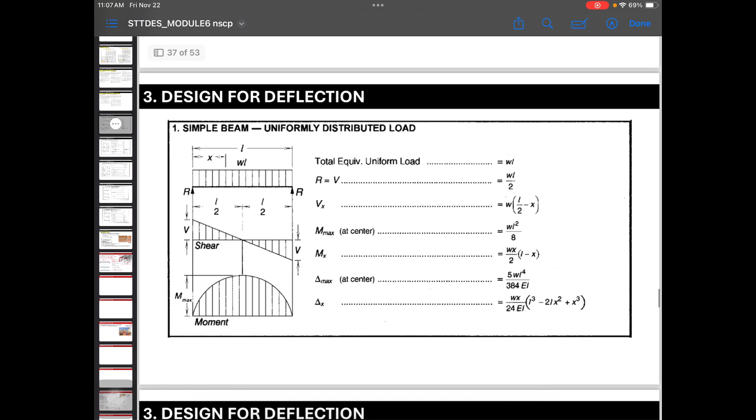Since I've given you a table of usual beam cases, you can refer to that. Search for whether this beam situation is there - a simply supported beam with uniform load. Actually it is there, number 1: a simple beam with uniform distributed load. If the load has a different shape, you can't use this anymore, but if it matches as is, you can use it.

So we need the maximum shear - that's what we design for. The maximum shear for a simply supported beam, as you can see, is located at the support points, at point A and B, which is the support reaction.

So the maximum shear equals the reaction. Since there are two supports and the load is distributed equally on the left and right side of the beam, the reaction at point A is the same as the reaction at point B. That's why R equals the shear, using the equation WL over 2.

So even without drawing the shear and moment diagram, you can use this equation readily. RVB equals RVA. To get the vertical reaction or the shear, substitute W, which is 1.348, and the length of 4 meters, then divide by 2. The answer is 2.696 Newton.

And since there's no horizontal load, the horizontal reactions at point A and B are both 0. So now we have the shear.

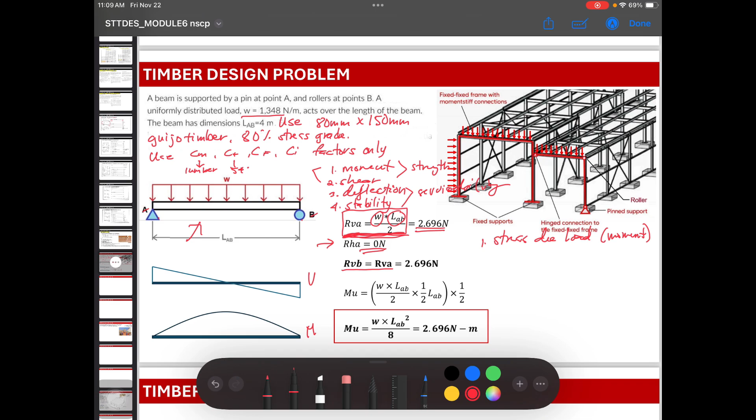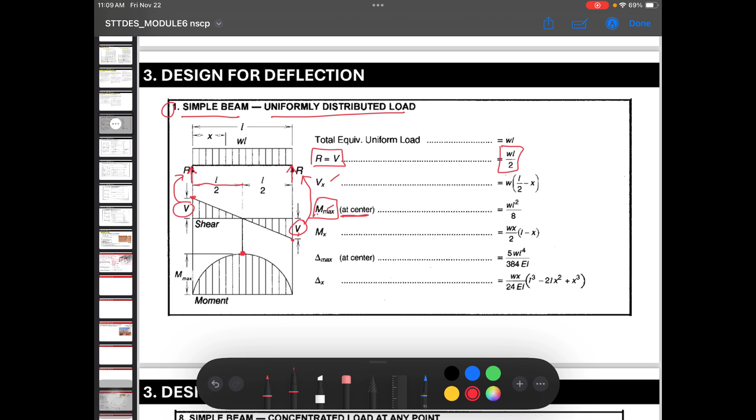So it says that occurs at the center. You can see here it's at the center, L over 2, L over 2, and the formula is WL squared over 8. That's the M max at the midpoint.

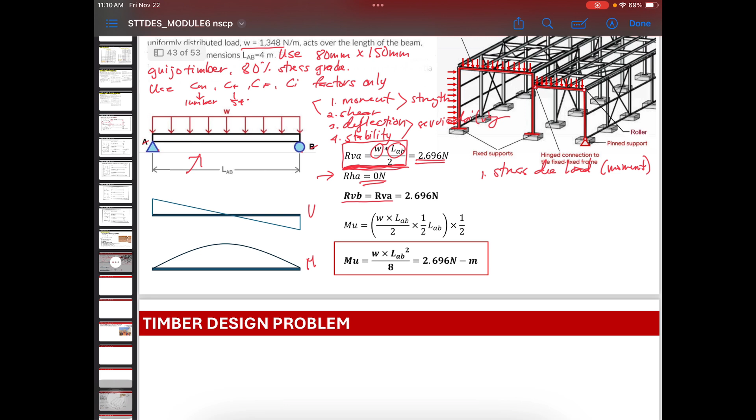That's why we have this formula, WL squared over 8, and when computed it equals 2.696 Newton-meter. When you substitute, W is 1.348, and the length is 4 meters - you square the length, then divide by 8. So that's our moment, and that's our shear.

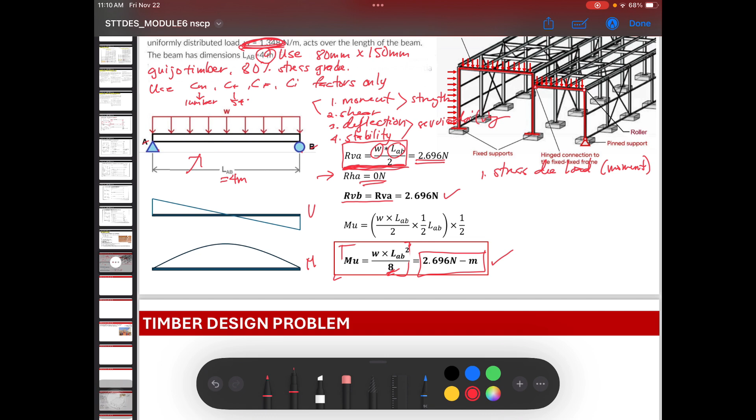Let's get the stress due to the moment. Let's take the moment first. Let's check the moment - let's design against the moment, which is equal to 2.696 Newton-meter.

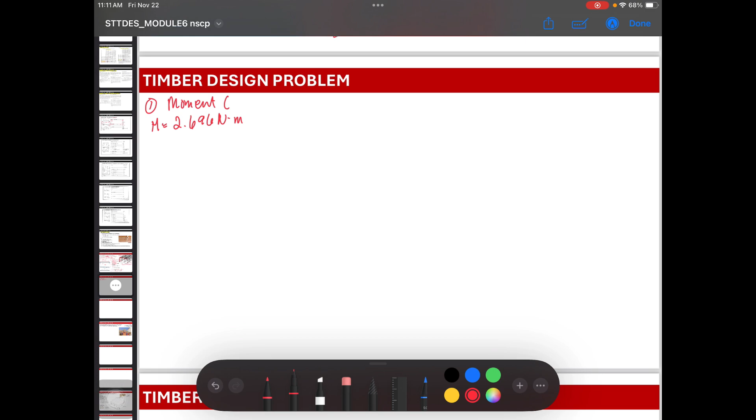What's our formula to get the stress due to loads? This is our moment load, so it's in our formula. This is the stress due to moment load.

FB is equal to M over S, where M is the moment load and S is the elastic section modulus, or it can be MC over I, where C is the distance of the farthest fiber of the section from its centroid, using this formula for a rectangular section. And I is the moment of inertia with this formula. So let's memorize D over 2, BD cubed over 12, and BD squared over 6 as the section modulus.

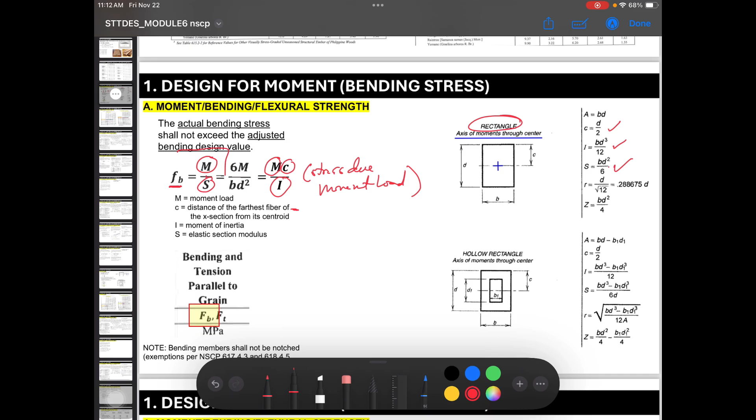So FB, the bending stress due to load, you can use this equation, M over S, or MC over I. Let's use MC over I first. So for the bending stress, denoted by small f subscript small b, MC over I. So we need C and I. Let's write the formula: C is D over 2, and I is BD cubed over 12.

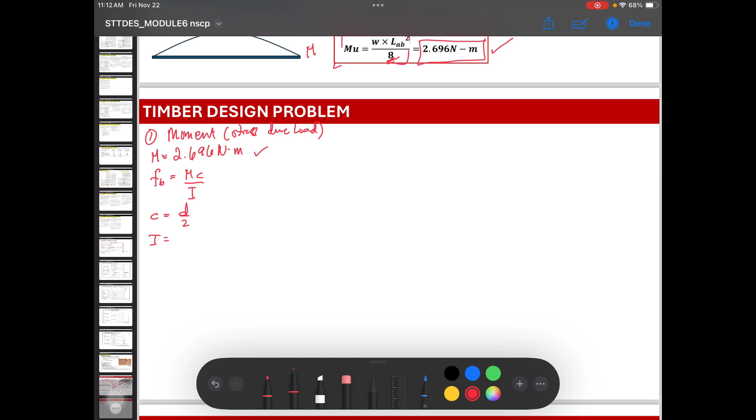What are our D and B? The section we're using is 80 mm by 150 mm. Let's draw our section: it is 80 mm, 80, and 150 mm. As we said earlier, these original dimensions are not what we use.

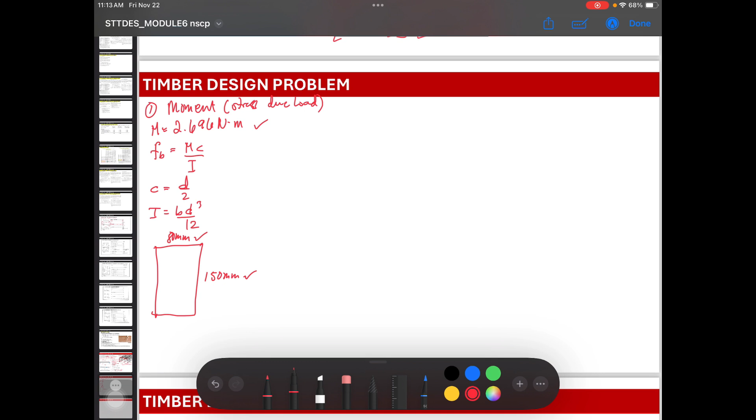Because we reduce these original, initial dimensions since we have an allowance for manufacturing or fabrication purposes. So we need to reduce them first. What is Rule A? If 4 inches and below, your reduction is 3/8 inch. If above 4 inches, your reduction is 1/2 inch.

So this is in inches, but we're using mm. Let's convert this into mm first. So 3/8 is equal to, converting 3/8, it is 9.5 mm. And then 1/2 is 12.7 mm. That's what we'll subtract.

So let's check our section. 80 mm, this is... let me erase. 80 mm, this is 3.15 inches. 150 is 5.9 inches. So this is less than 4, so our reduction is this 3/8.

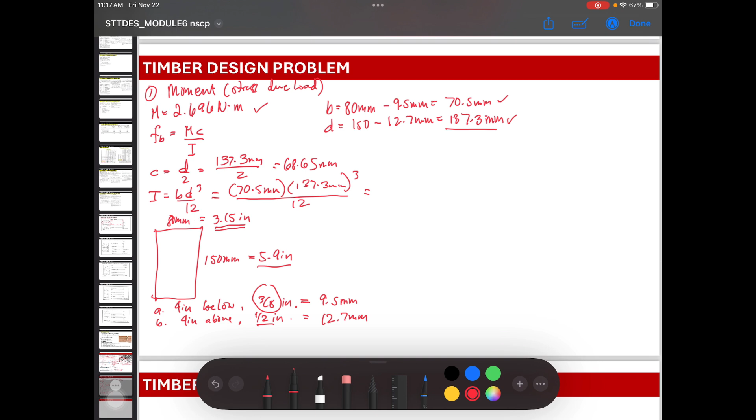It is 70.5 mm times D, which is 137.3 mm, cubed, all over 12. This is equal to, wait, 70.5 times 137.3 cubed all over 12. It's a long number: 15,206,157.44 mm raised to 4. For moment of inertia, the unit is raised to 4, right? The exponent. So now it's complete.

We can now complete this bending stress due to load equation. Let's put here MC over I. So our moment is equal to 2.696 Newton meter.

So it's in meters, but our C and moment of inertia are in terms of mm. So we need to convert this meter into mm. How is the conversion? 1 meter is equal to 1,000 mm. That's the conversion, so it cancels and mm remains. That's how we converted the moment.

Now for C, let's attach C to complete the equation. And then, all over moment of inertia, which is a long number, 15,206,157.44 mm raised to 4. So our answer will be 2.696 times 1,000 times 68.65 divided by 15,206,157.44. Our answer is 1217.

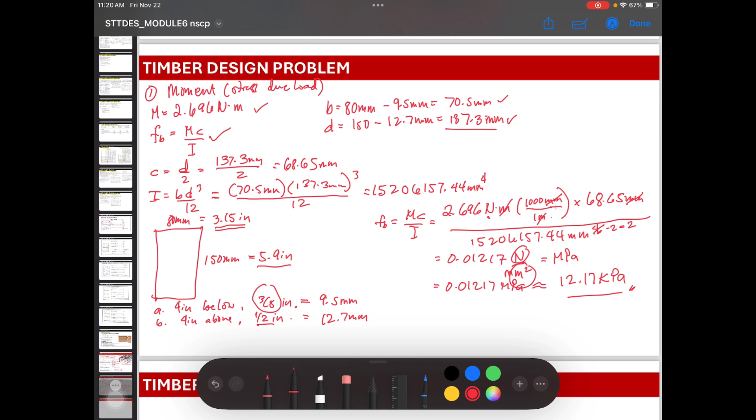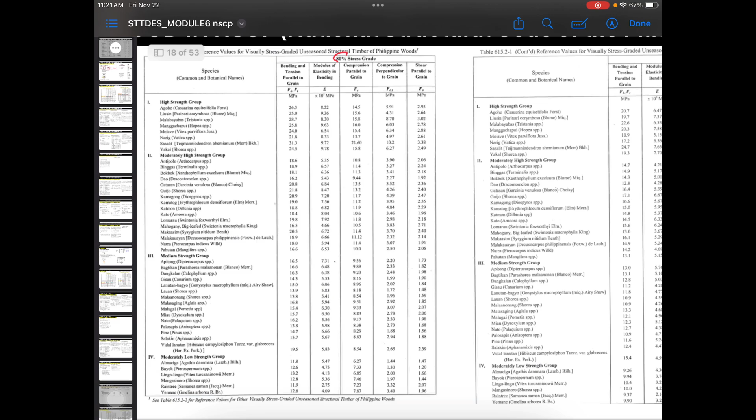Let's get the bending stress capacity of the beam, denoted by capital F, subscript capital B. So what did we say? The bending stress is already given in the NSCP table. So check what your material is. It is Guijo timber with 80% stress grade. And then we're designing for bending, so we go to the bending column. This is 80%, because the other one is 65.

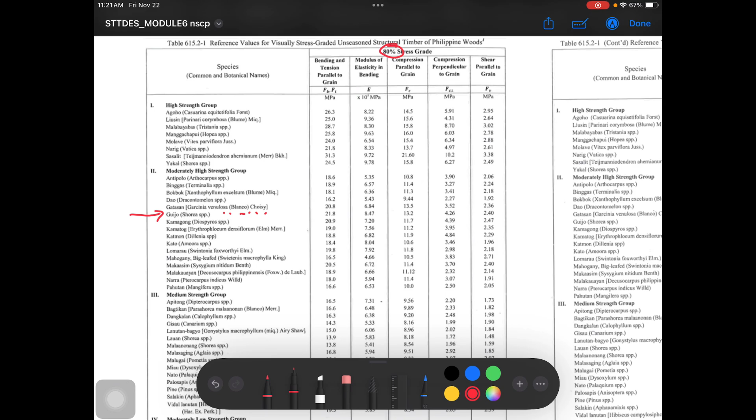Sorry, 63 is the other one. So we go to the 80% stress grade. And then we're designing for FB, so we go to the FB column. And take note of the unit, it's MPa. I wish we hadn't converted to kilopascal. Anyway, if you look, here is Guijo, and its bending stress capacity is 21.8 megapascal.

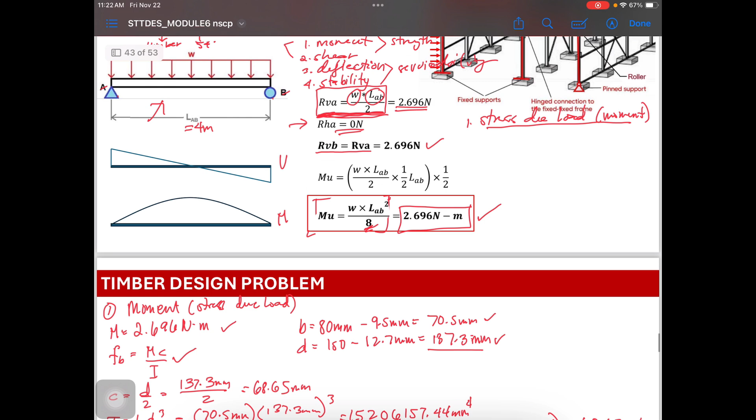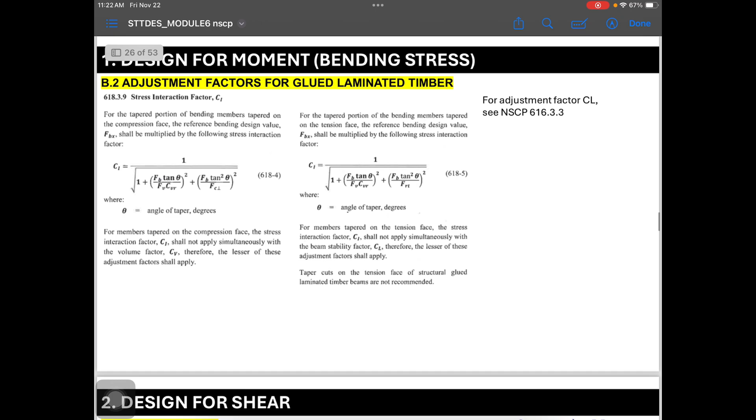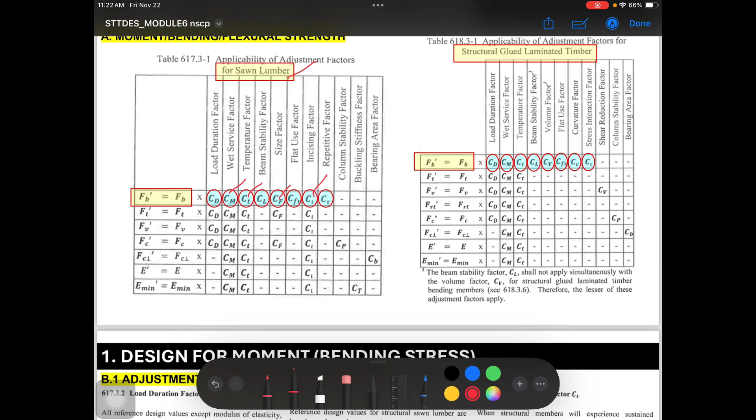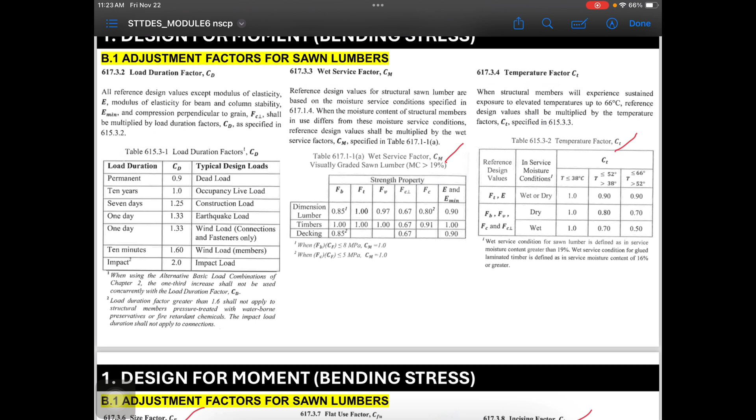So we have CM, CT, and the others are CF and CI. Let's get the factors we'll use. For CM, it's lumber based, right? And for FB, it's 0.85. There's a superscript, we need to check this one. FB and CF - let's get CF next.

Let's check this later. So 0.85 for CM, for CT it's for 54 degrees. And then for bending, we go with wet condition since we have a wet service, which is more conservative compared to 0.7. So it's 0.5.

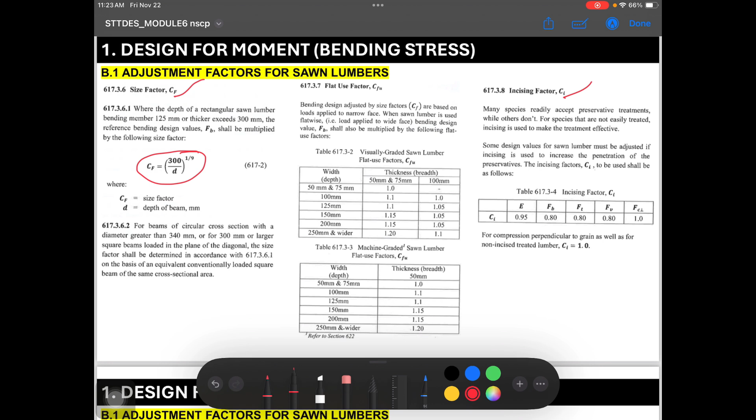And then we have a formula for CF. Let's take note: 300 over D, to the power of 1 over 9. And for CI, since we're designing for FB, it's 0.8. So we have 0.85, 0.5, 0.8, and this 300 over D to the 1 over 9.

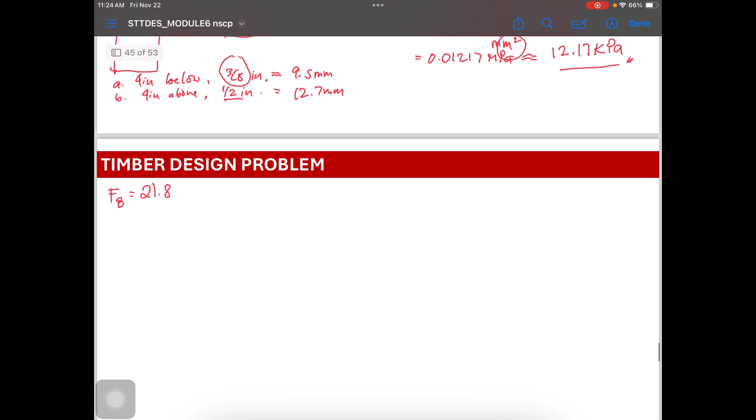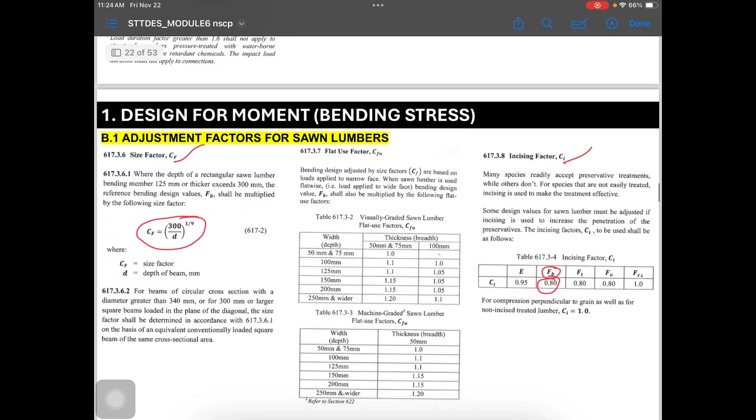So let's take note, CM is 0.85, CT is 0.5, and CI is 0.8. CF, oh my gosh, I can't remember. What's the formula for CF again? 300 over D to the 1 over 9, as you said.

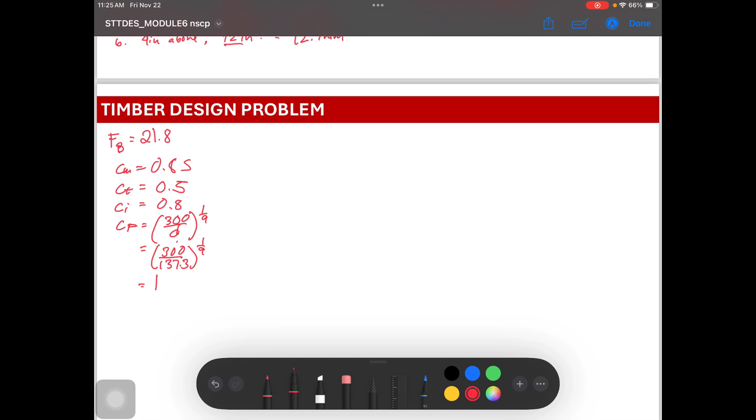300 over D to the 1 over 9, okay? So we need D. What is our D? 137.3, right? So let's substitute: 300, 137.3, to the 1 over 9. And this equals... let's compute it below. 300, 137.3, raised to 1 over 9. That gives 1.09 - that's our CF.

And then we need to read the footnote. CF is 1.09, let's read the footnote. Where are we - shear 2, no, let's go to moment for sawn lumber. Moment, sawn lumber, CF... no, the footnote is for CM: when FB times CF is less than...

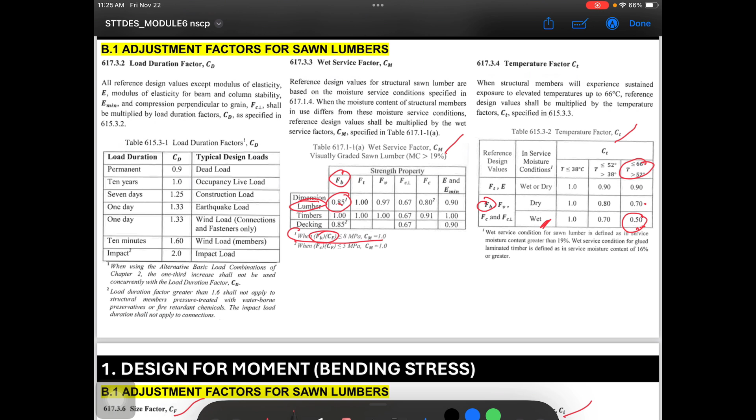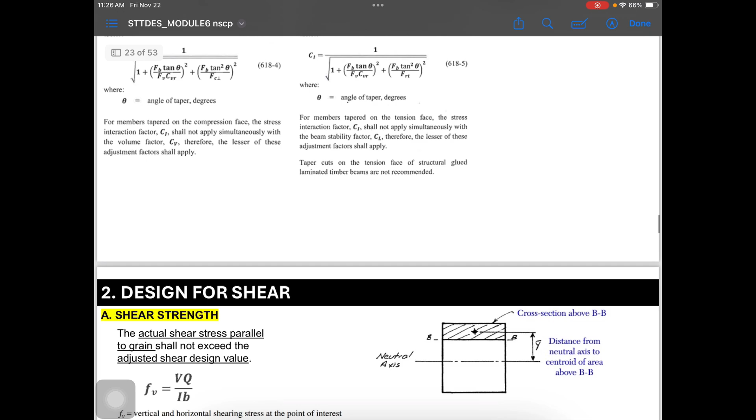Let's follow this. What's our FB? 21.8, times CF. What's our CF? Anyway, if it's less than or equal to 8, it's just 1. FB times CF should be less than or equal to 8. What's our CF? 1.09.

Oh, it's 20 - greater than 8 MPa. We can use this one. We're greater, so if it's less than or equal to 8 MPa, our CM would be 1. So it's okay - actually it's more conservative if we use this one.

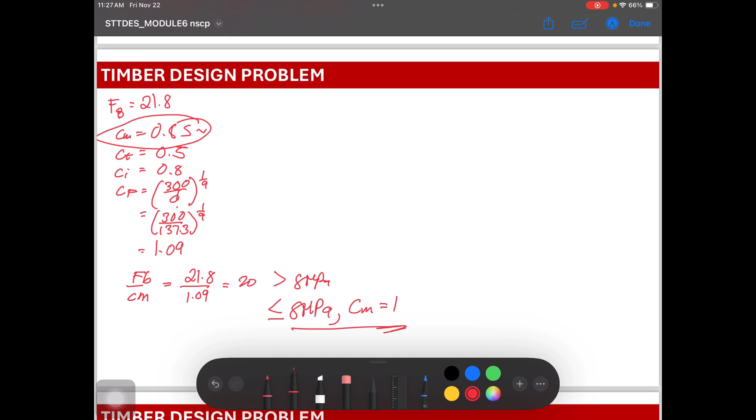Not 1. Okay, so next, let's apply these factors to FB which is 21.8. So our effective FB is equal to 21.8 times CM which is 0.85, times CT which is 0.5, times CI which is 0.8, and times CF which is 1.09. If you want to be conservative, you can just put 1, but earlier the conservative value for CM is 0.85 rather than 1. Let's compute 0.85 times 0.5 times 0.8 times 1.09.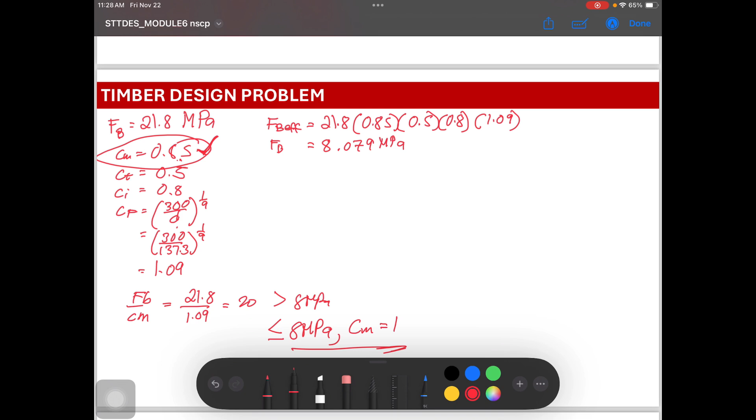Oh, it's getting late. We'll just use this in MPa. So this is our FB, the bending capacity of the beam. This is what we'll compare to small f-b. This is quite small, since it's in MPa - we compare using MPa, not kPa. So our bending stress is very small.

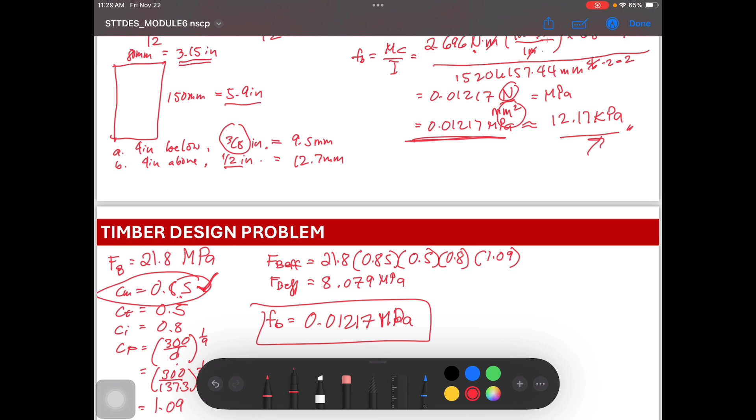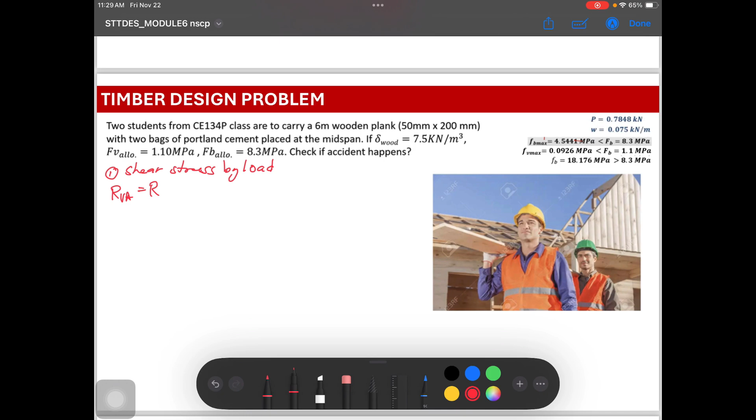So our timber's capacity passes - that's the conclusion. Okay, next, let's move to shear. What's our formula for shear? Step 1, you need to get the shear stress from the load. What's our load? It's R, or RVA, which is our RVB, and also our maximum shear.

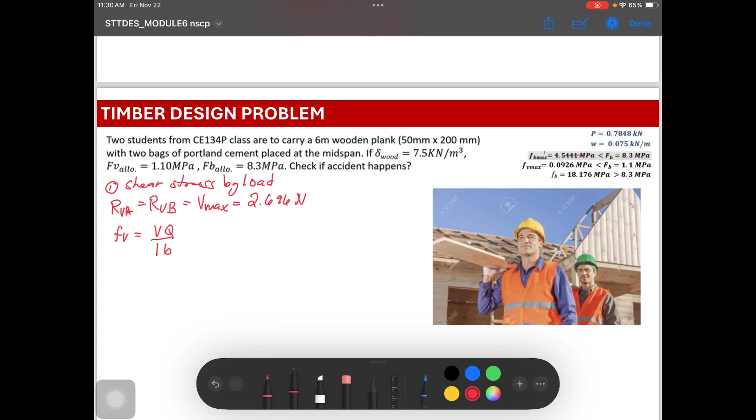And that equals 2.696 Newtons - that's our shear. So we need to get the shearing stress due to the load: VQ over IB. So what is Q, what is I, what is B? Let's go back to the lecture on shear.

Here, for shear, Q is equal to area times Y. So what are our A and Y? Our A is the area of the upper portion of the beam, and Y is the centroid of that upper area, its distance from the x-axis. So let's solve.

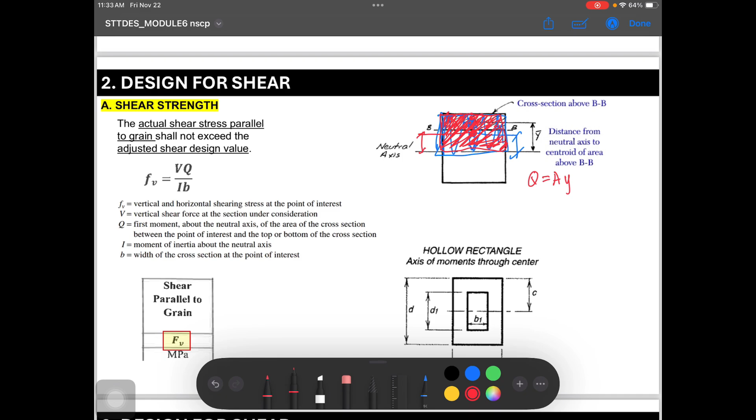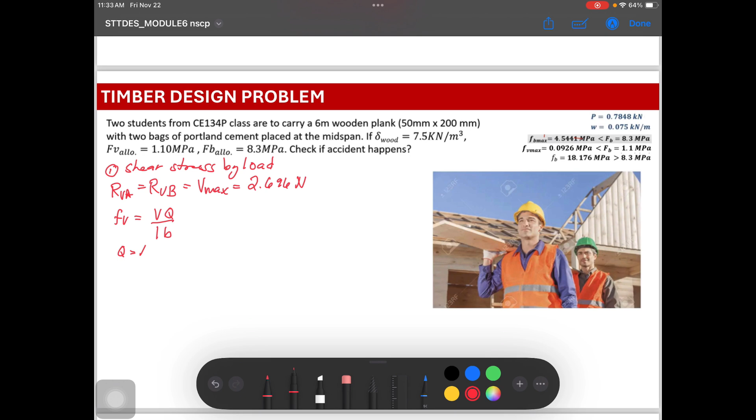So let's fill up. What is our Q? It's the area times Y. Let's draw our material, and since we're designing, we'll use the reduced dimension: 70.5 and 137.3 in mm.

So Q is equal to A times Y. Q is the area, the upper half only. So this one. That is 70.5 times 1/2 of 137.3. That is the area. And then, what is the distance Y?

That is the centroid of the upper area to the x-axis, which is 137.3 over 4. This is our Q, and it is equal to 70.5 times 0.5 of 137.3, times 0.25 of 137.3. It is 166,126.89.

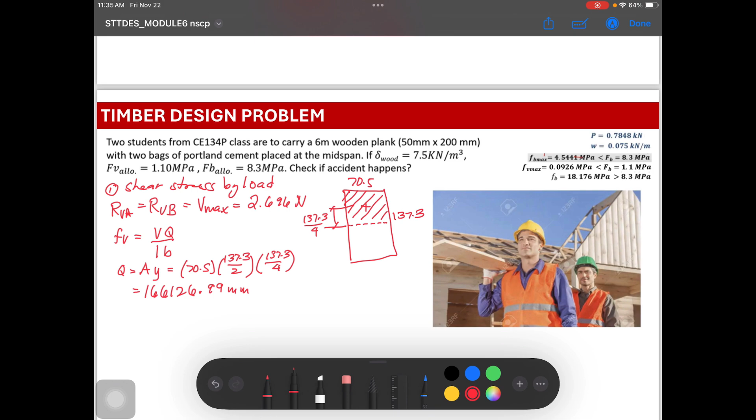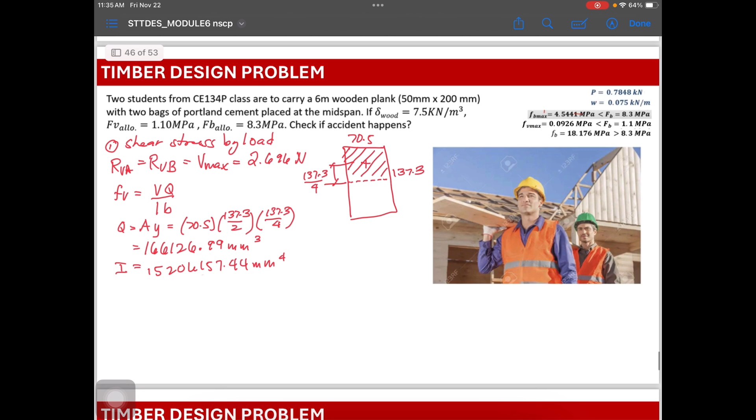And then what is our I? We already solved it earlier, so we can just copy it since we're talking about the same section. It's the same. That was included. Raised to 4, that's our I, we don't need to solve for it again. And then our B is the width of the section, which is 70.5 mm.

So let's substitute into our shearing stress due to load. What is our V? It's 2.696 Newton times our Q, which is 166,126.89 mm cubed, all over I, which is 15,204,157.44, and our B is 70.5 mm, this is mm raised to 4.

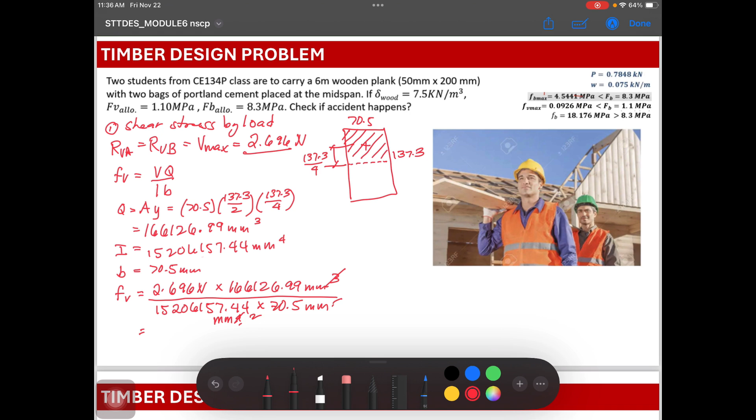So let's check the units. M raised to 3, then here 4 and then 1, so total exponent is 5. So it can cancel, leaving squared in the denominator. So that's correct, the remaining unit is a unit for stress, Newton per millimeter square.

So let's calculate: 2.696 times 166,126.99, denominator 15,206,157.44 times 70.5. Okay, so our shear stress due to the load is very small. It's only 4.177 raised to negative 4 megapascal.

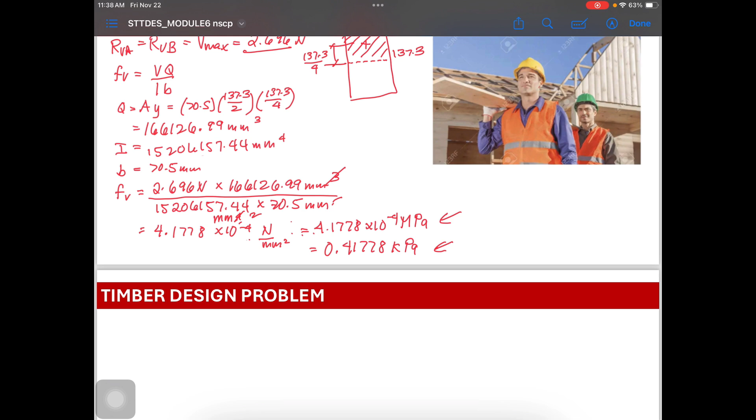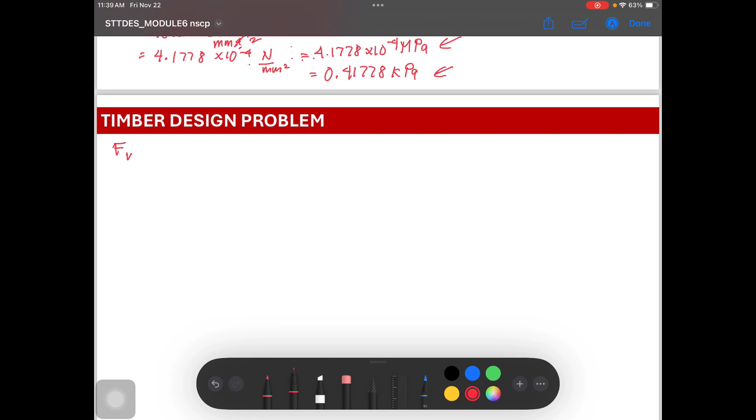Or also 0.41778 kilopascal. So we need to compare this to the shear stress capacity of the beam, denoted as FV subscript capital V. Let's check the Guijo. Our material is a Guijo with 80% stress grade.

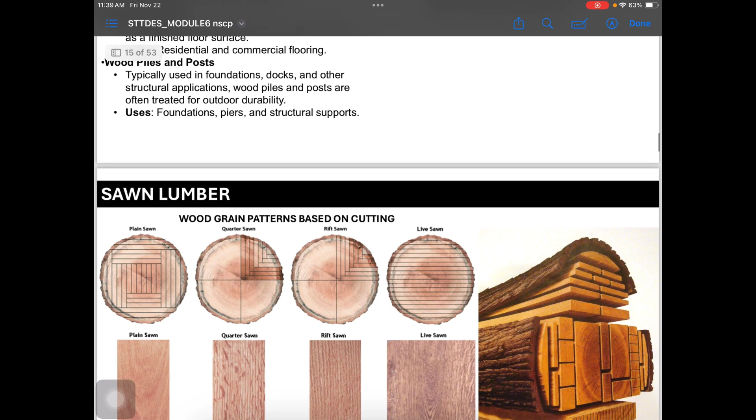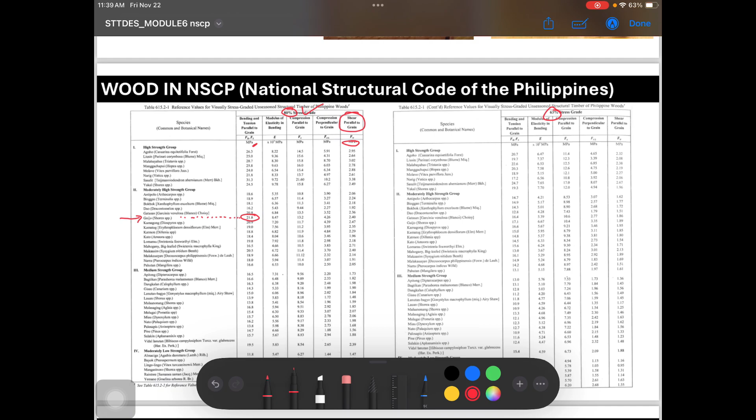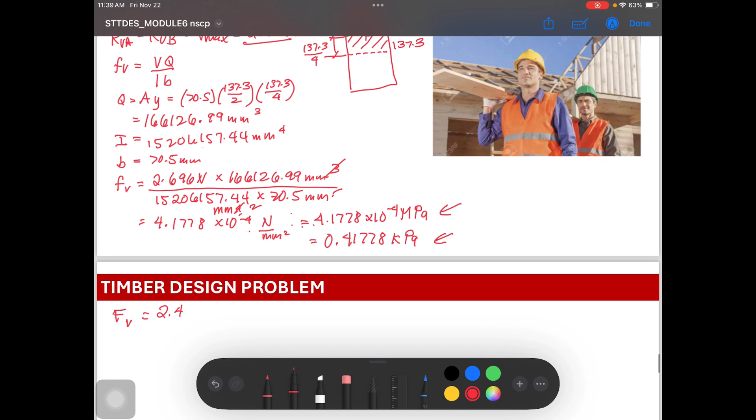Let's go back to the NSCP table for our timber. Since we're designing for shear, we go to the shear column, unit is MPa. For Guijo, 80%, it is 2.4 MPa. Back to 2.4 MPa, and of course this capacity we need to reduce.

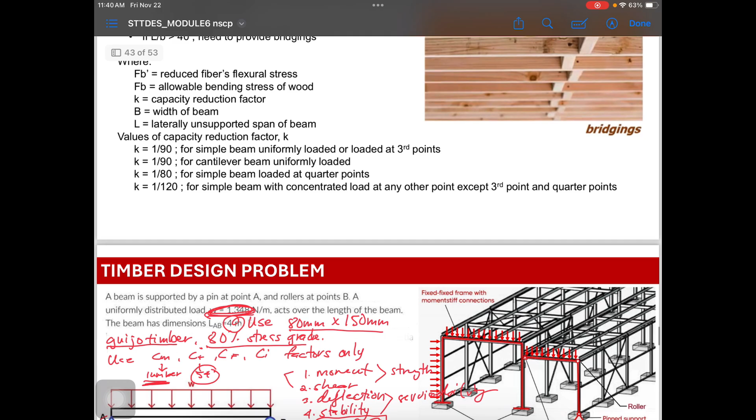The factors needed are CM, CT, CF, and CI. Let's check for shear. Here, for sawn lumber, these are the shear strength adjustment factors. CM, CT, and CI only — for shear, CF is not included among the factors.

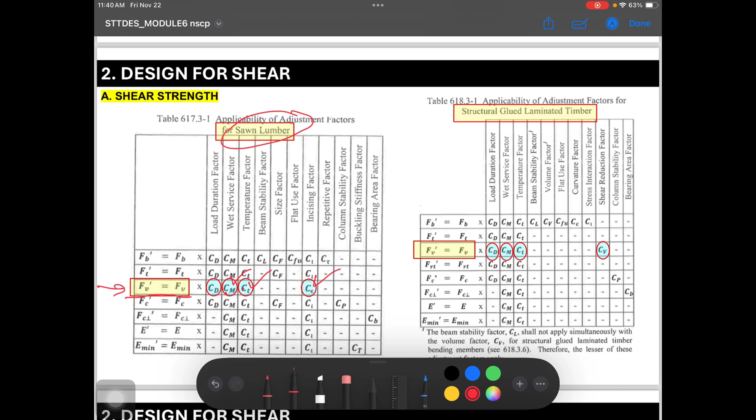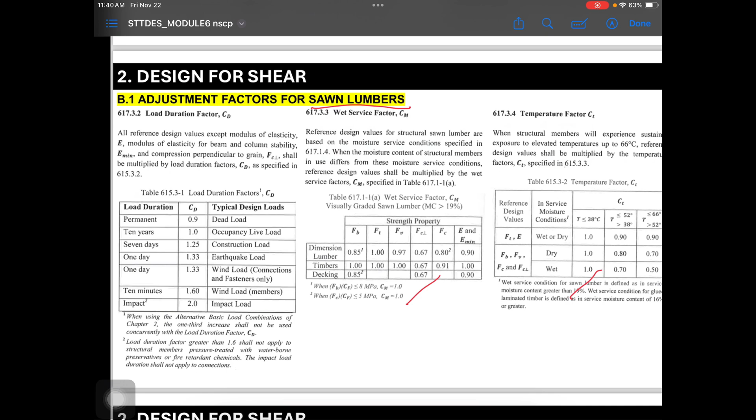So here are the tables for sawn lumber for CM, CT, and CI. These are the factors for sawn lumber. Our CI for shear is 0.8. Our CT for shear, same as bending, is 0.5. And for CM, FV for lumber, 0.97. So 0.97, 0.5, and 0.8.

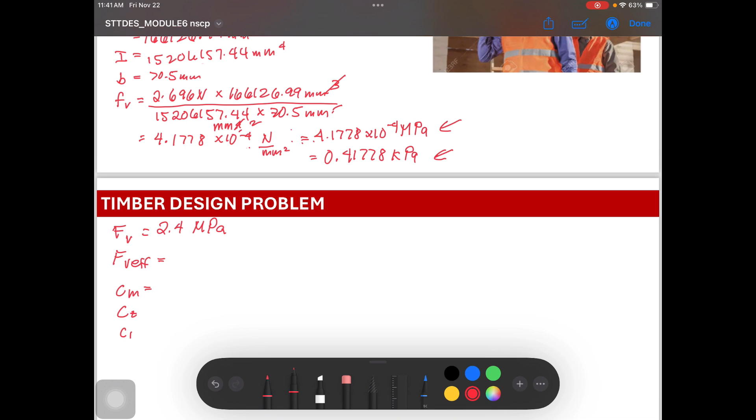So our FV effective — let me write it — CM, CT, and CI: this is 0.97, this is 0.5, this is 0.8. We multiply that by 2.4 megapascal, times 0.97 times 0.5 times 0.8. This is equal to 0.9312.

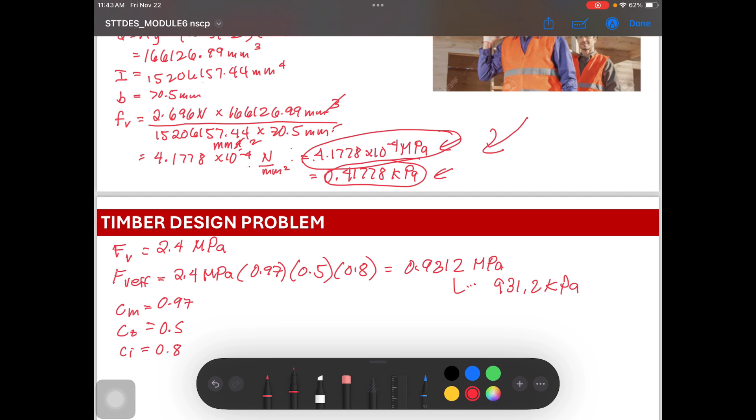This is all that's left of the beam's shear capacity. But if you compare it to our load, the shear stress due to load, the beam's capacity is still much higher. If you convert it to kilopascal, it will be 931.2 kilopascal. So it's still much higher. That's just the kilopascal value of shear stress due to loads — the capacity is very large in comparison.

Next is deflection. So for deflection, we need to get the deflection caused by the load and then compare it to the deflection limit of the beam. Deflection due to load is what's in the table I gave for simple beams.

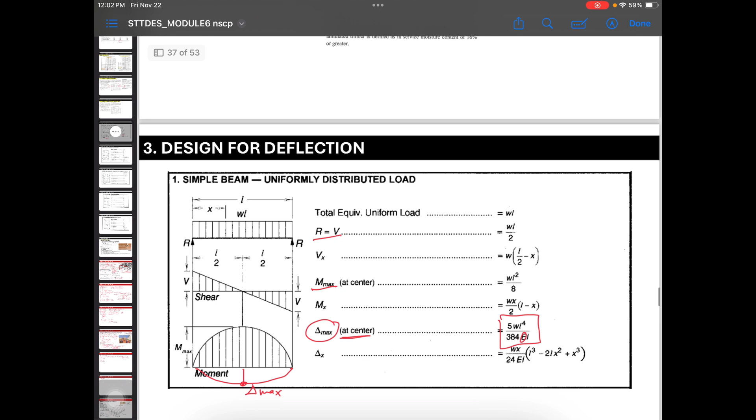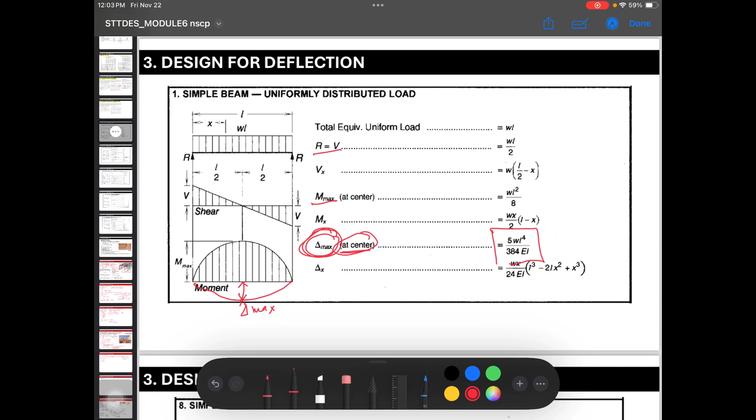So this is it, right? Here's delta max, which is the delta maximum, noted as being at the center. So if this is the deflection of the beam, here is delta max, the displacement due to the load. The formula is delta max equals 5WL raised to 4 over 384EI, since this is due to the load.

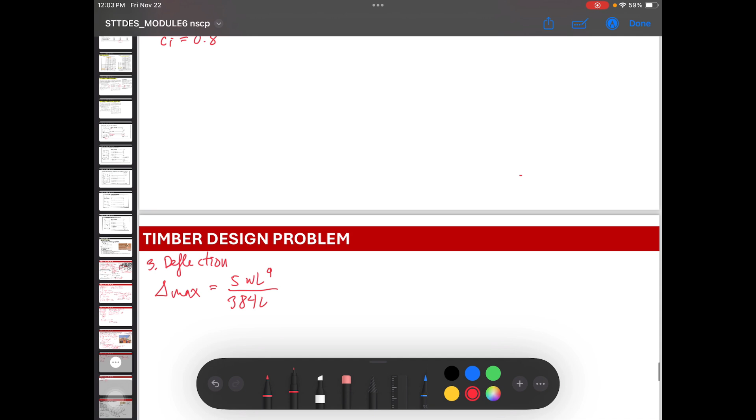What is our W? Let's fill up the other variables first: 1.348 Newton, 1348.

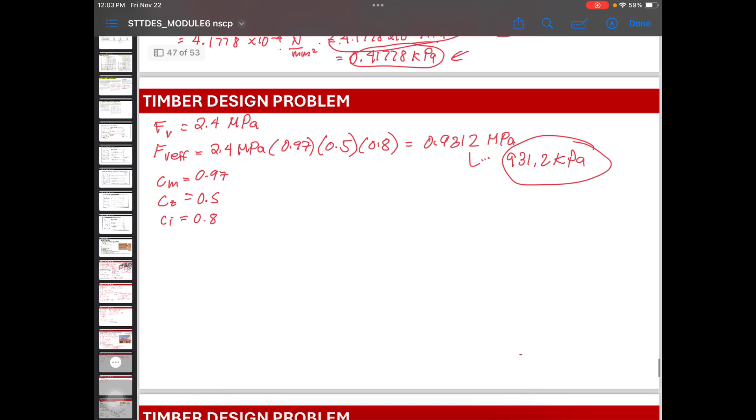Tama, 1348 Newton per meter. And then our L is 4 meters. Ang I natin, meron na tayo.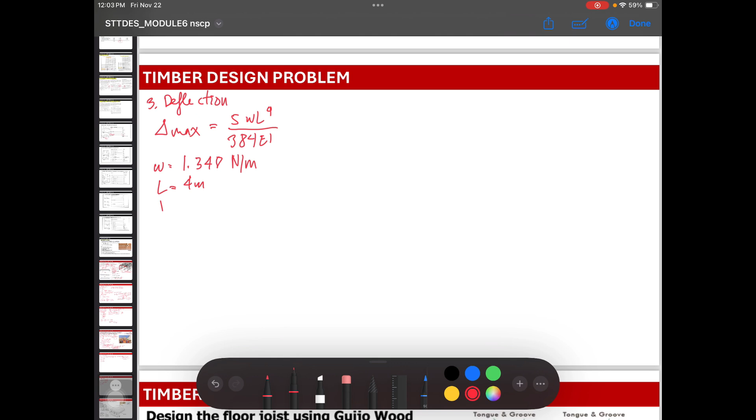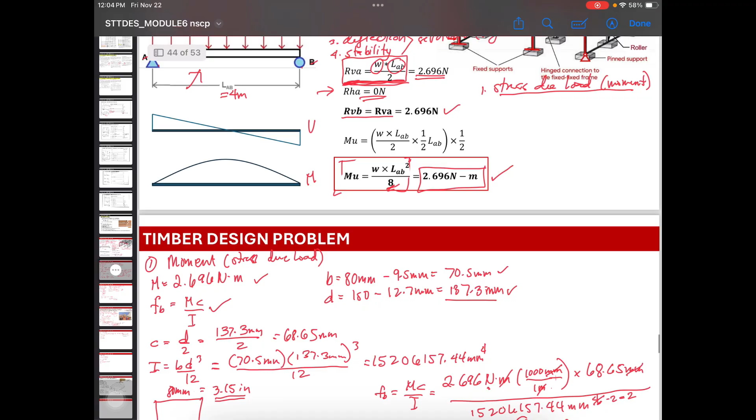Copyin natin yung nasa taas. So, may moment of inertia and then the E. Nakadepende sa species ng kahoy. So, pupunta ulit tayo doon sa table ni NSCP for Guijo 80% stress grade.

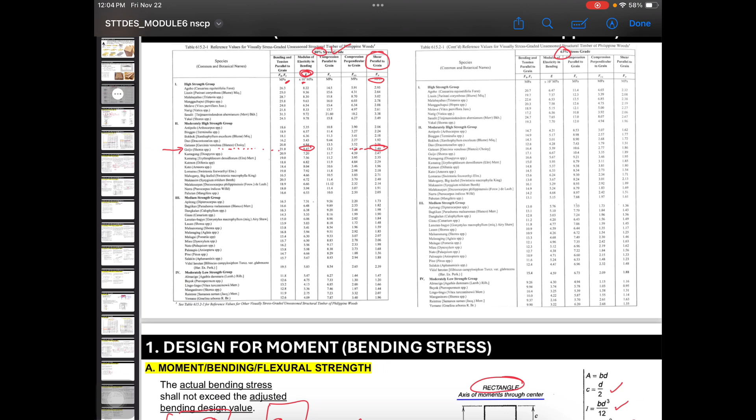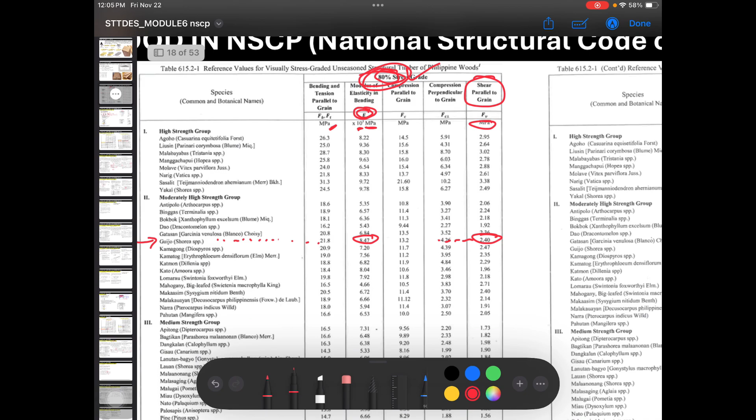Ito. So, ito yung modulus of elasticity, this E. And then, makikita nyo yung unit. It is E times 10 raised to 3 MPa. So, this is raised to 3, ibig sabihin GPa yan. Gigapascal. So, for Guijo, nasa 80% tayo. So, 8.47 ang E niya. 8.47. So, we can go back.

8.47 times 10 raised to 3 MPa. So, substitute na natin. And then, yung units natin, MPa, this MPa can be noted as Newton per mm raised to 2. Yan din yung MPa sa inyo. Yan. Then, si length natin, naka-meter. So, gawin natin mm. So, 4,000 mm.

Yan, ang equivalent yan. Etong si W, convert na din natin. So, 1 meter is 1,000. So, 1 meter over 1,000 mm para makancel si meter. This is 1.348 times 10 raised to negative 3 Newton per mm.

So, substitute na natin siya kay delta max. I'll rewrite it here. So, 5. Our W is 1.348. Newton per mm. And then L is 4,000 mm. Doon pa pa. Okay. Hindi pa ako tapos. 384. Our E is 8 point... Oh, yung E, we need to reduce para this one muna.

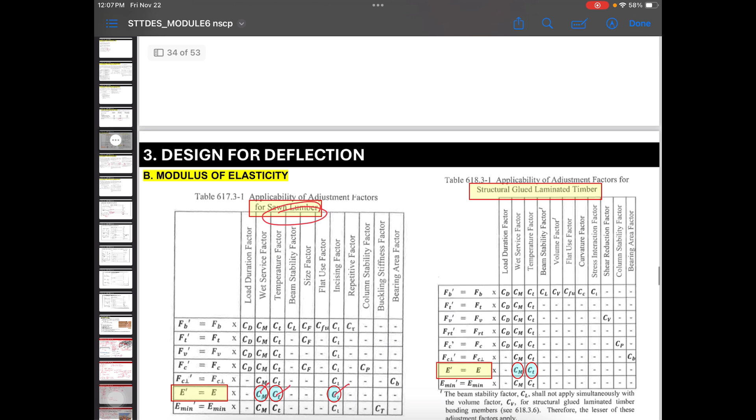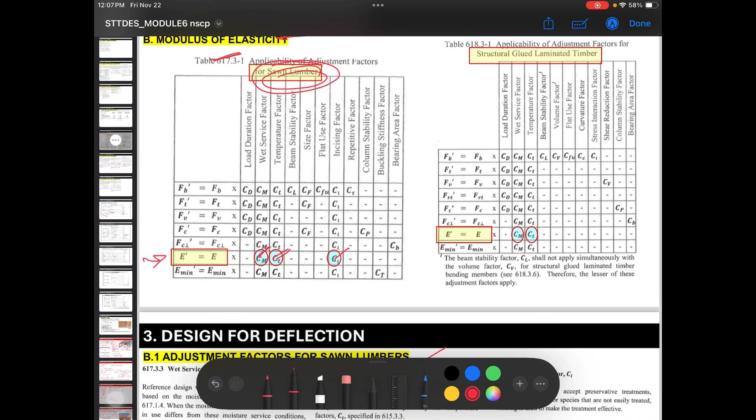So, for our E, ano yung mga reduction factors for E? Or yung mga adjustment factor? Design for shear, deflection. So, deflection, the E adjustment factors for sawn lumber are this one. So, ito ang para sa E, CM, CT, and then CI. So, tingnan natin for sawn lumbers, CM, CT, CI. So, ito yung para sa modulus of elasticity.

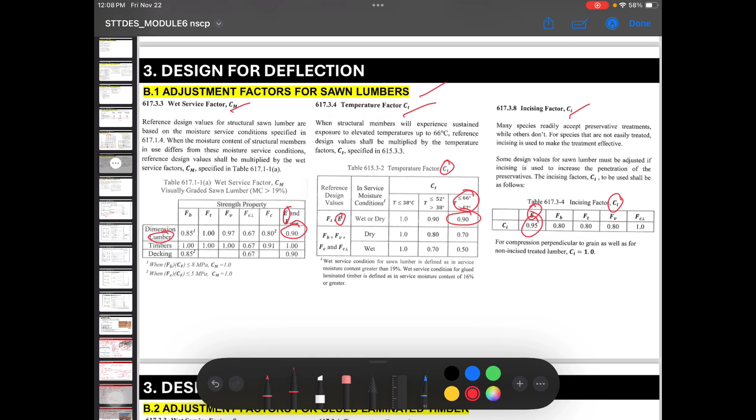So, ito siya. Nasa elasticity na tayo. So, for lumber, itong 0.9 tayo. CT for 54 degrees. And then for E, so 0.9 din. At CI for E, ito siya, 0.95. I-multiply lahat ng factors dun sa E. So, E effective will be 8.47 times 10 raised to 3 MPa times our CM is 0.9, CT is 0.9, CI is 0.95. So, times 0.9 times 0.9 times 0.95. Our effective na E is 8.47 raised to 3 times 0.9 times 0.9 times 0.95. 6517.665 MPa na lang.

So, let's substitute yung amount ng E sa formula ng deflection. So, it is 6517.665. MPa nga is Newton per mm raised to squared. Squared yun. Sorry. This is squared. MPa nga eh. Squared yan na. Okay, ano pa? E and then I. Our I is 15206157.44 mm raised to 4.

So, let's evaluate yung mga units. May mm raised to 4 ka dito, may mm raised to 4 doon. Cancel. May Newton dito, may Newton din dito. And then, for the mm, cancel ang isa dito, cancel to. So, ang natirang unit is mm. So, ang unit for our deflection is mm. Calculate na natin 5 times 1.348 raised to negative 3 times 4,000 na raised to 4. Denominator 384 times 6517.665 times 15206157.44. So, it is 0.045 mm. Ito ang maximum deflection.

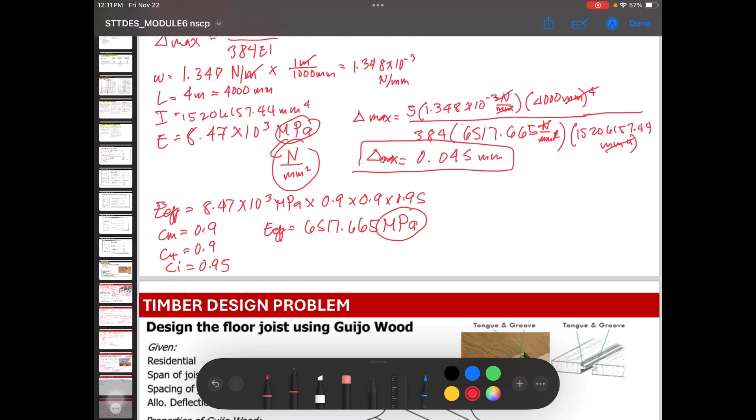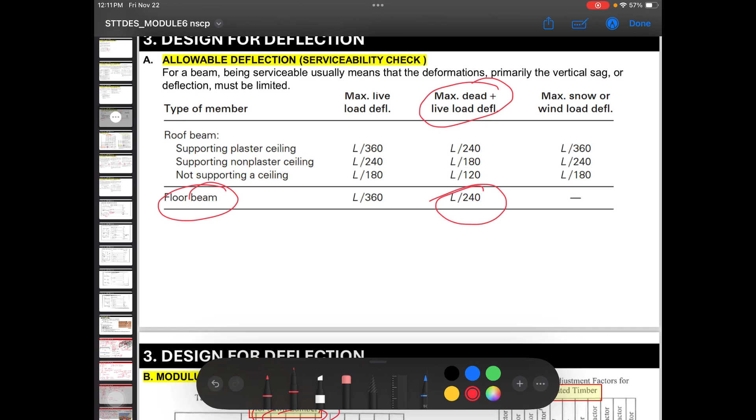So, saan natin kukumpara dun sa limit ng beam natin? May formula tayo ng limits ng beam. Yung simple lang naman ito. Ito. So, floor beam, maximum na may dead load and live load, use natin ito. Length over 240. Yan yung limit natin. Hindi tayo pwedeng lumampas dyan. So, delta limit is, ano nga ba? L over 240.

So, ang length natin is 4,000 mm divided by 240. This is equal to 16.67 mm. So, hindi naman tayo lumampas. Ang liit nga ng deflection natin. 0.045 mm lang. Eh, ang limit, 16 mm. So, hindi tayo lumampas sa limit.

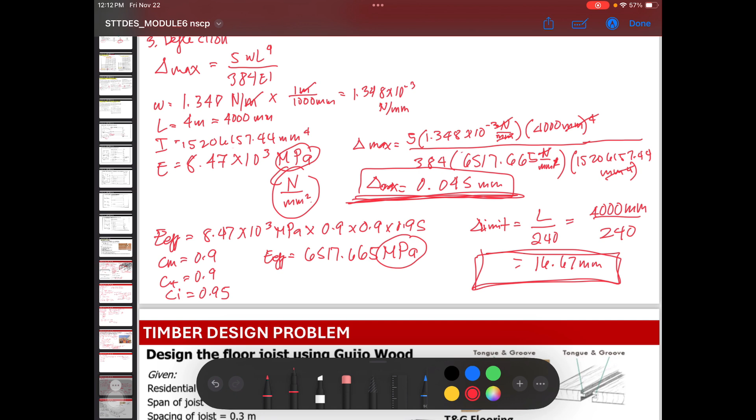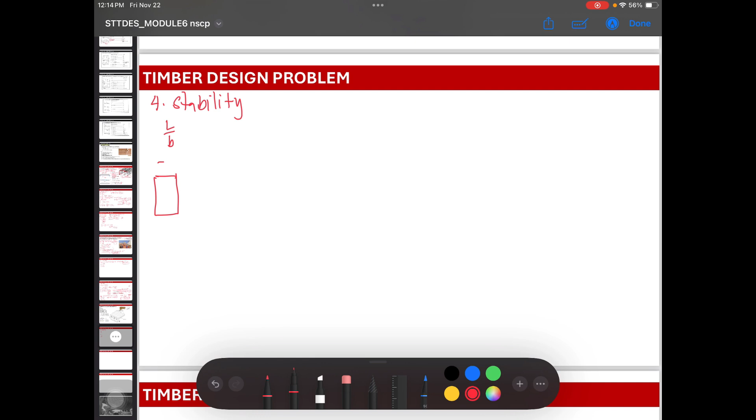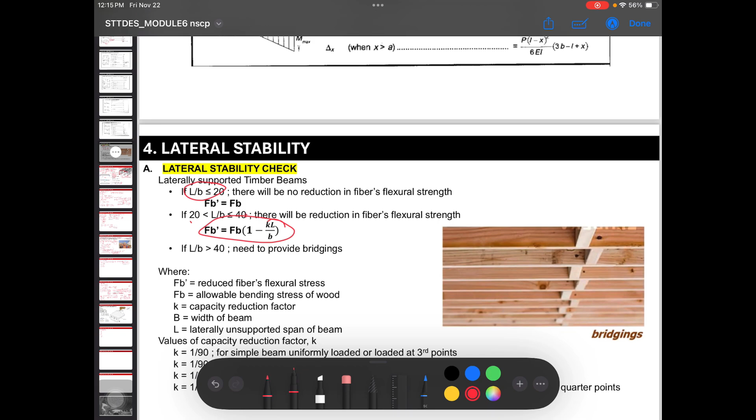So, our deflection is okay. So, okay yung bending, okay ang shear, okay ang deflection. So, number 4 is stability. So, ano ang formula natin dito? It is L divided by the B, yung width. So, ano yung width natin? It is 70.5. Kailangan less than or equal to 20. Or, if hindi, if it is between 20 and 40, may reduction ka sa FB. If super lampas siya sa 40, conclusion, need to give or provide bridgings.

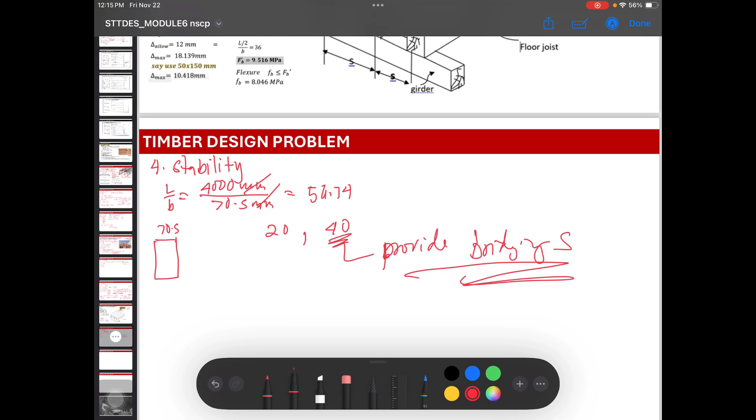So, check natin yung L over B. So, length natin is 4,000 mm. And then, our B is 70.5 mm. 56.74, and no units, canceled units. So, lampas siya sa 40. Eh, di ba may limit tayo na 20 and 40? So, lampas tayo sa 40. Ang conclusion dito, provide bridgings. Okay? So, lampas tayo dito. So, that concludes ito.